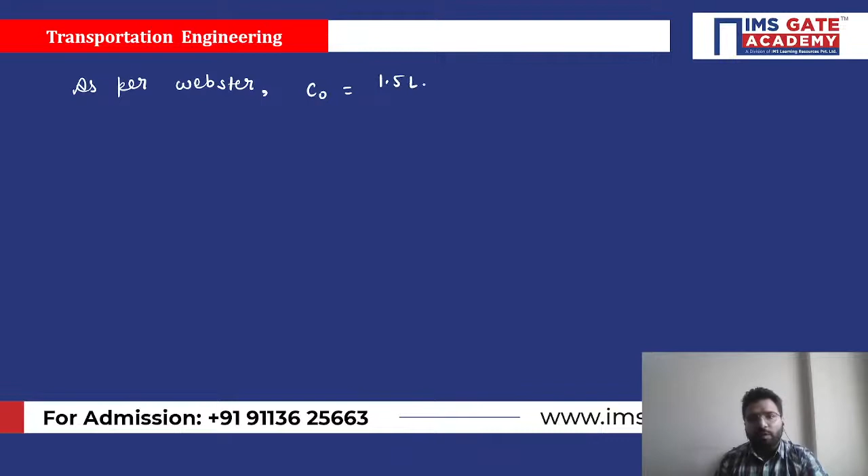So what is Webster method? As per Webster, the principle of the method is that delay should be minimized. Any signal you design, the basic agenda is that delay should be minimized. So what's the formula for Webster method? C naught equals 1.5L plus 5, upon 1 minus Y. So C naught is the optimum cycle length, 1.5 into L.

L here is the total lost time - lost time of all the phases. Most students make a mistake here: they consider whatever the question has given directly. No, you have to check whether they've given the lost time of all the phases, or per phase. If they give per phase, you have to convert it for all the phases. If they give the total for all the phases, that's okay for me.

And the 1 minus y term will come how many times? Whatever the number of phases are there. So here the question said to you 3 phases are there. So it will be y1 plus y2 plus y3.

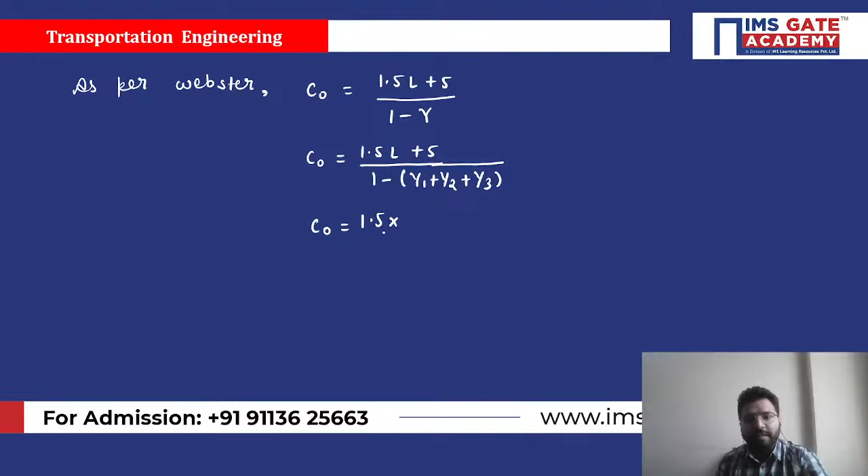Right, so if you see here, C naught is equal to 1.5 L plus 5. Let's put the L value first. So L value, if you see, the question has given 10 seconds. The total time lost in the cycle is 10 seconds. So 1.5 into 10 plus 5. So here you can see, the question has given lost time in the cycle. Cycle meaning all the phases are included, and 1 minus y is what here?

Y is the critical flow ratio. So how much have they given? 0.3, 0.25 and 0.25. Let's put the value here. 0.30 plus 0.25.

1 minute. Something is wrong. Just a minute. So here if I say C naught is equal to... 1 minute, just give me a minute.

So here if I say C naught is equal to 1.5 L plus 5 upon 1 minus y, and C naught is equal to 1.5, L value is 10, plus 5 upon 1 minus, and critical flow ratios are 0.3, 0.25, 0.25, so 0.30 plus 0.25 plus 0.25. Okay, so if you solve this, can you tell me, anyone, how much it's coming?

So to solve this, it's going to come 100 seconds here. Okay, so with 100 seconds, now what are they asking us? They are asking us effective green time, and we know the formula of effective green time, right? So G1 is equal to y1 upon y into C naught minus L, right?

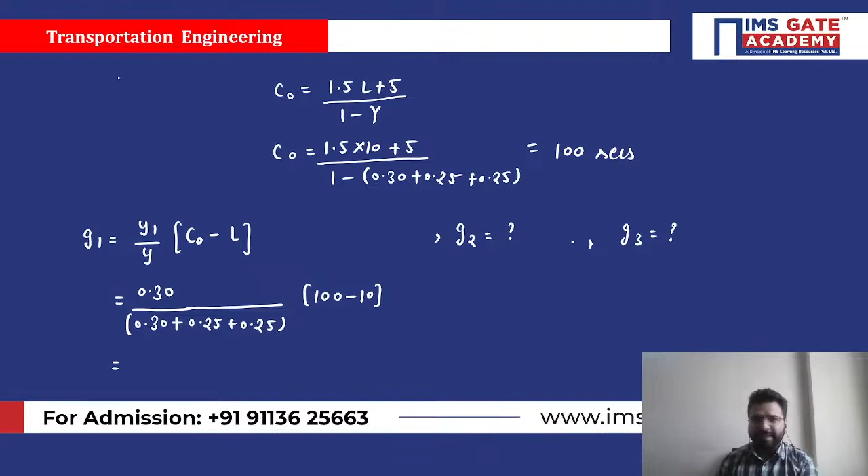But I don't want to solve in this way, right? If I solve in this way, it's definitely not a smart way. So here we have 100 seconds, and you see options are given to me here: 34, 28, 28; 40, 28, 28; 40, 30, 30; 34, 25 and 25. So I know the total cycle length is 100 seconds. And what is the meaning of cycle length? Cycle length means the summation of time allocated for each phase, right?

So now you will say, sir, we will do the summation, and whichever comes to 100 will be the answer. Like option C here, that is 30 plus 30 plus 40, that will become 100. No. Here is where students make the mistake. Definitely the cycle length is 100, but we have to include these 10 seconds also. You cannot ignore the 10 seconds here.

So what we do here, we have to check the option in which the summation is not 100 seconds but 90 seconds. Why 90 seconds? Because 10 seconds are allocated for the lost time. So now you can tell which option is correct, in which option the summation is coming 90. If you see here, 28 plus 28 is 56, plus 34, it will become 90, and definitely answer A is correct.

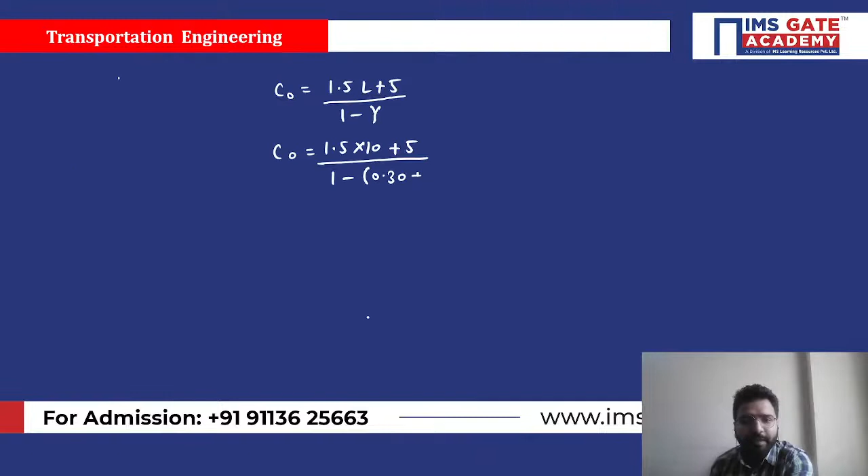Option A is correct. If you want to apply the formulas, you can apply the formula also, no problem. But the thing is, you can solve this question in a maximum of 15 to 20 seconds. Once you know the C naught value, it can be done with the help of options only. So here option A will be correct, 34 plus 28 plus 28. No need to do anything else, right? So this is the first question.

If you want to apply the formulas directly, you can, I have no problem with that. So option A is correct here. Why is option A correct? Because total cycle length will be equal to G1 plus G2 plus G3 plus lost time of all the phases.

So here you can see C naught, how much we got? 100. And G1 plus G2 plus G3 will be equal to what? Total lost time is how much? 10 seconds. So you can see here G1 plus G2 plus G3 will come to 90 seconds, and only one option is there which is satisfying this 90-second condition.

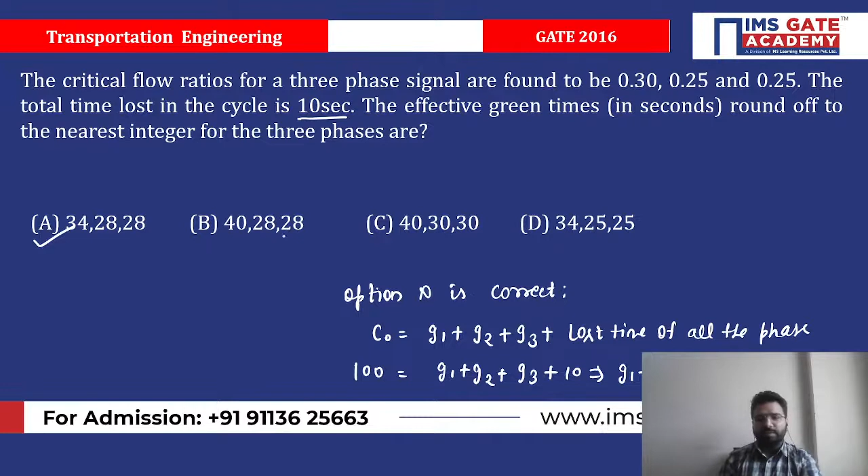Now the question may come in your mind, sir, if they have not given options, can we tell directly? No, beta, you cannot say directly. Then definitely you have to apply the formula. G1 is equal to Y1 upon Y into C naught minus L. Then you have no other choice; you have to apply the formula. Other than that, we can't do anything in this one.

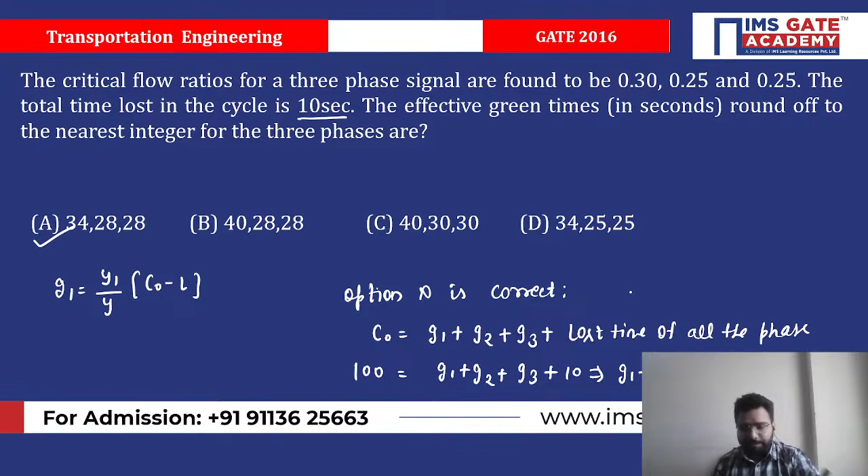Okay. And Webster method is one of the most important topics continuously coming in GATE. Don't miss it, only two formulas are there in the whole method, and a 2 marks question we have seen last year, last to last year, every year we are seeing the question. Okay. So let's proceed to the next question.

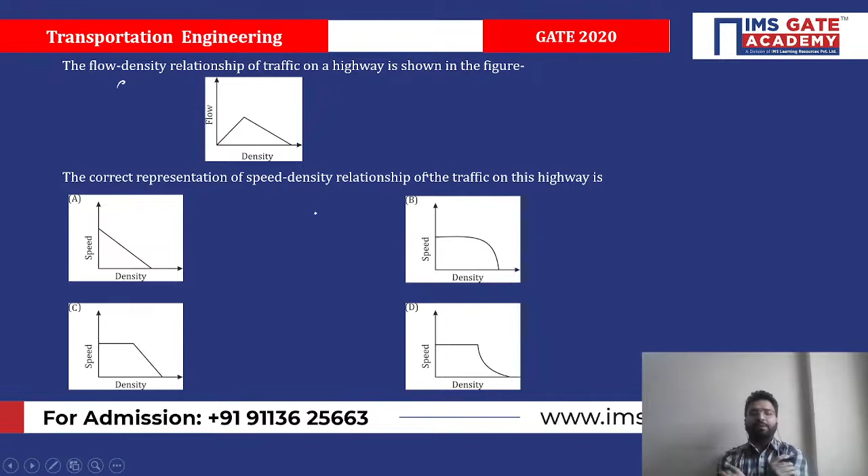The next is, again, a very good question, which came in GATE 2020. What is the question? The flow density relationship of traffic on a highway is shown in the figure. The correct representation of the speed density relationship of the traffic on this highway is. I put this question in the best category of questions that have come in transportation engineering in the last years. Okay, a really good question, right?

So flow is given to us, density is given to us. Flow generally we denote with Q, and density we denote with K. Now you think how to solve. The question looks like a transportation engineering question, right? But technically it's a mathematics question. Only one concept is required from transportation that I hope all of you know. Q is equal to K into V.

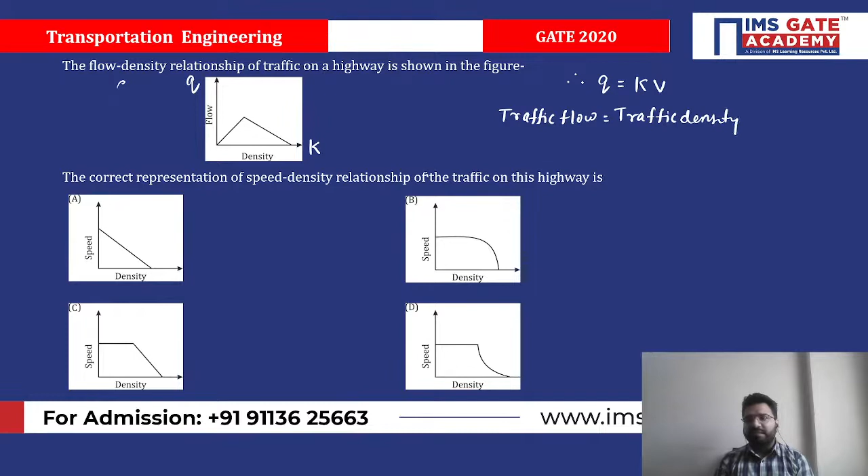What is Q here? Traffic flow. Traffic flow is equal to traffic density into traffic speed. So here I am telling you one more point. Traffic speed meaning is what? Traffic speed here means space mean speed. This concept GATE used last year, in 2022.

They have given the two types of speed in the question, time mean speed and space mean speed, and they ask you to pick the speed which was required in the question. So if the question gives you both speeds, we always have to pick the space mean speed. Time mean speed has no significance in that one. Okay, so now come to the question.

So as I said, the question requirement is only and only mathematics. So we have to convert the QK graph to a VK graph, because speed is V and density is K. So how can we convert? Simple mathematics. You can see here in the flow density graph, initially what is there? Initially they have given you a straight line, right?

So let me put some values here. Let us say here density is K1. I don't know, I'm just assuming some value. And here density is, let us say, K2. And here the flow is, let us say, Q1. Okay, I am just taking random values. Here K1, here K2, and here Q1. Now if I focus on the initial straight line, what is the equation of a straight line? You know.

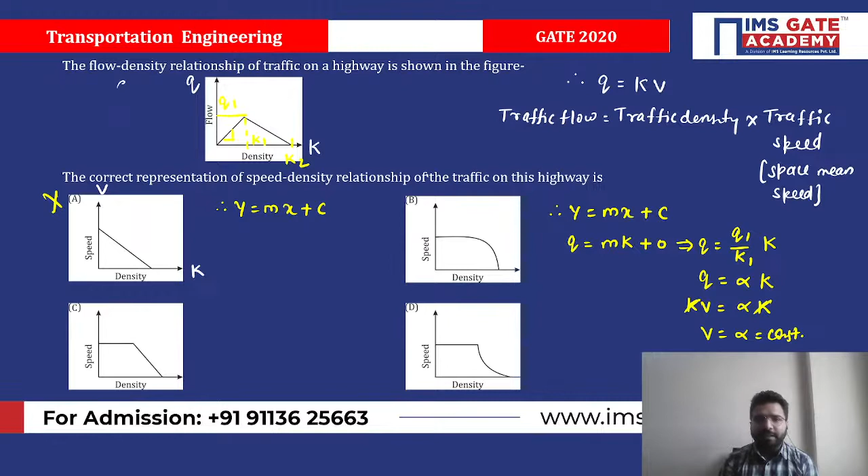So now how to check B, C, D? Again the same thing: write the equation. So for the second part, I'm solving here. Again, I know y is equal to mx plus c. On the y-axis, Q is there, and m into x plus c. You can see m here in this second line. This second line is what? It's decreasing.

So if it's decreasing, will the slope be positive or negative? Definitely the slope will be negative. And what is the slope value? Again, it will be some constant. What will be that constant? Let me write the constant. In this triangle, now you can apply tan theta. So it will come to Q1 upon

K2 minus K1, because this length will be K2 minus K1, into x. On the x-axis, what is there? K, plus C. Is C zero here? No, here C is not zero. Why? If you extend this line here, this part will be our C. How can we find this C?

You can see this is the complete bigger triangle. If you consider it, what C value will come? This is my C, and this is theta. Theta means what? This value I know. And if I multiply with K2, definitely it will be m into K2. M is what? Slope only. So theta into K2 will give us the C value.

So now you can see Q is equal to Q1 over K2 minus K1, a complete constant with the negative sign, so minus alpha into K, plus m K2. M is constant, K2 is constant; both become another constant, let me say beta. So this I got again between Q and K. I want it between V and K. So Q equals K into V equals minus alpha K plus beta. So V is equal to minus alpha plus beta upon K.

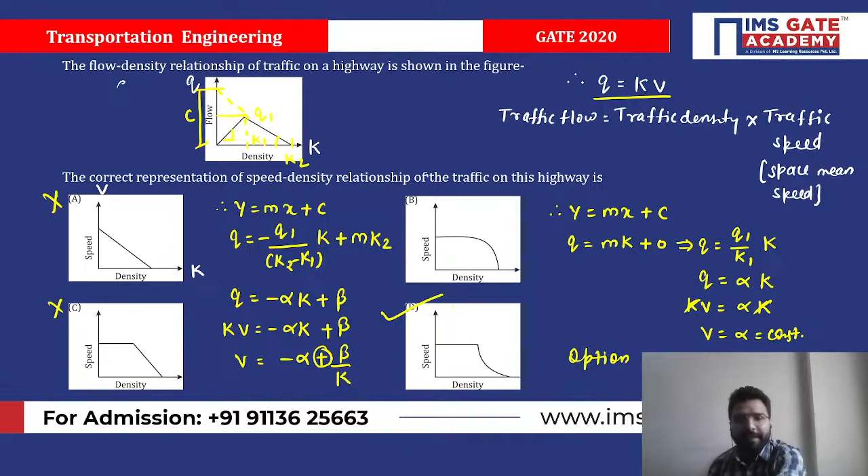What you have to remember: just write the equation of the curve, whatever is given to you, and Q is equal to KV. Eliminate the third variable which is not required. Here they want K and V, so I eliminated Q and put K into V. Maybe they want K and Q or V and Q, so accordingly you have to eliminate and check the options. So again it will not take much time. It's basic mathematics. Come to the third question.

On a road, the speed density relationship is found to be V equals 70 minus 0.7K, where V is the speed in kmph and K is the density in vehicles per kilometer. At the capacity condition, the average time headway will be? In the whole of transportation engineering, we have only one formula to calculate the time headway: C equals 3600 upon Ht, where Ht is in seconds, and C is in vehicles per hour.

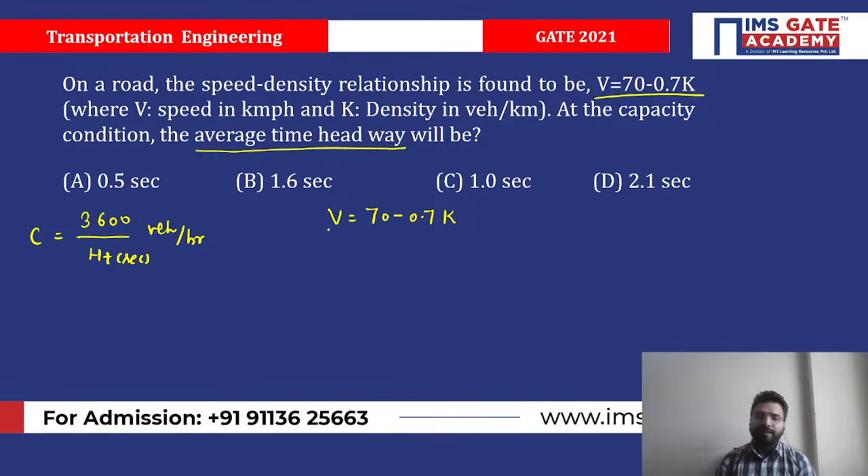So they are asking us to calculate the average time headway at the capacity condition, and they have given an equation: V equals 70 minus 0.7K. Notice the relationship between K and V is linear. If it's a linear relation, I know it's the Greenshields model. According to the Greenshields model, Q max equals Kj into Vf upon 4.

If I draw the curve for the Greenshields model, here we consider K, you can consider it on the y-axis also, and it's a straight line graph, with Kj here and Vf here, between K and V. One method is you write Q equals KV, take the first derivative, find the K value, and accordingly find the V value. I'm not going that way. I'm just going to apply a small trick, not a trick, it's also a concept.

Now in this equation, if K equals 0, the speed is Vf. So put K equals 0 and you get Vf equals 70 kmph. Similarly, if K equals Kj, what does Kj mean? Kj means jam. If there is a jam on the road, the speed becomes 0.

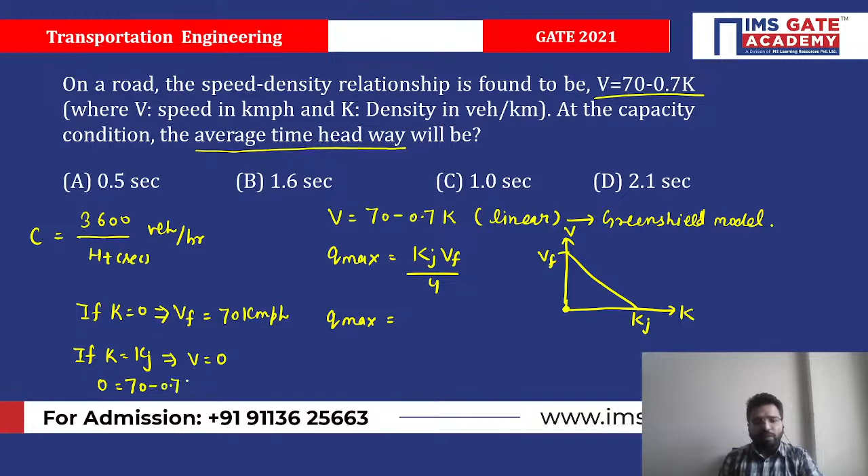So if K equals Kj, V will be 0. Putting this condition here, 0 equals 70 minus 0.7Kj, so Kj equals 70 upon 0.7 vehicles per kilometer. So Kj is 70 upon 0.7, Vf is 70, divided by 4. Can you tell me how much it's coming? 70 into 70 divided by 0.7 divided by 4. So how much is it coming?

1750 vehicles per hour. Right? Qmax means what? Qmax is nothing but capacity. Traffic capacity is what? Maximum flow possible. So here C means what? C is nothing but our Qmax. So Qmax is how much? 1750, which equals 3600 divided by HT.

So HT will come to how much? 3600 divided by 1750. It's coming to almost 2.057 seconds. So approximately option D is correct, 2.1 seconds. Okay, so option D is correct here.

But again, this question used the concept of the Greenshields model with the microscopic characteristics, that is the space headway or time headway. Always approach the questions by seeing what they are asking; first write the formula and see what is required and what is given. Whatever is given, put in the formula, then see what else is required, and what extra equations they have given us.

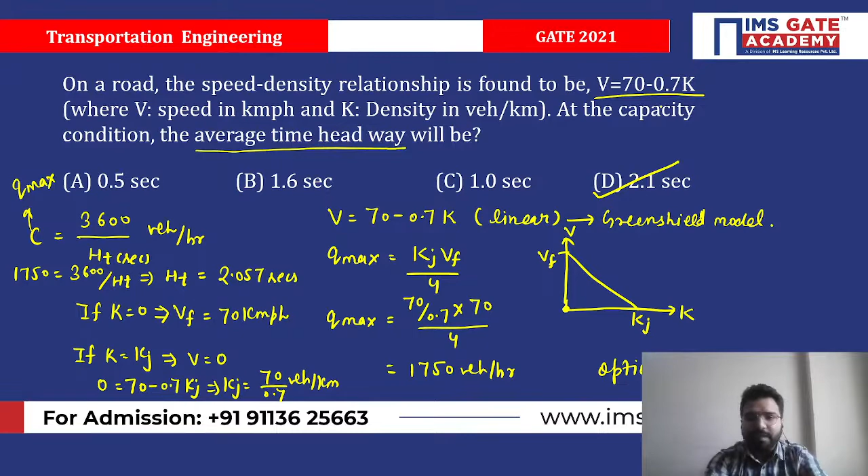For HT, I told you already, I have only a single formula in the whole subject. There should not be any confusion. For HT we have a single formula, C equals 3600 by HT, and you can apply this in a minute. It will not take more than 1 minute if you know the relationship between Q, K and V, and if you are good in the Greenshields model. Again, it's hardly a 30 to 40 second question. So this is the next question.

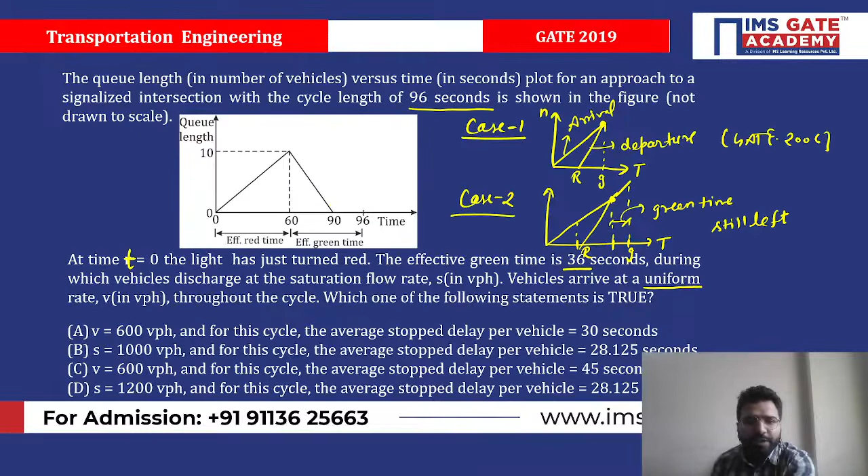You can see up to 60 seconds, vehicles are coming because it's red time. So let me say this is 60 seconds, this is my 90 second and this is my 96 second. So what happened initially? Up to 60 seconds, the vehicles have arrived.

How many vehicles have arrived? Here they have given us 10, they have given us 10. And definitely vehicle arrival will be uniform, so I will extend this line up to here. Let me extend this line up to here.

So now after 60 seconds, what will happen? After 60 seconds, the vehicles will start departing. So definitely up to what time are the vehicles departing? Up to 90 seconds, because 6 seconds are still left.

Meaning if I say here, up to 90 seconds vehicles are departing, so my departure graph will cut this line somewhere here, and this time is still left to us, this time is still left to us, right?

Now they are asking us three things: one is the vehicle arrival rate, second is the saturation flow rate, and third is the average delay per vehicle. So let's talk about the first thing, vehicle arrival rate.

Vehicle arrival rate is what, v? If they have given you the diagram, it's nothing but the slope of the arrival line. What is that? Slope of the arrival line, this is my arrival line. If I take the slope of this line, you can see what is slope.

Slope means tan theta, tan theta means what here? Perpendicular upon base. So you can see how much it is in this triangle. If I say it is 10, and here it's 60, so 10 by 60 meaning 1 by 6. What is the unit here? Any number of vehicle per time, in which unit given to us? Second. So vehicle per second, but they are asking us in VPH, vehicle per hour.

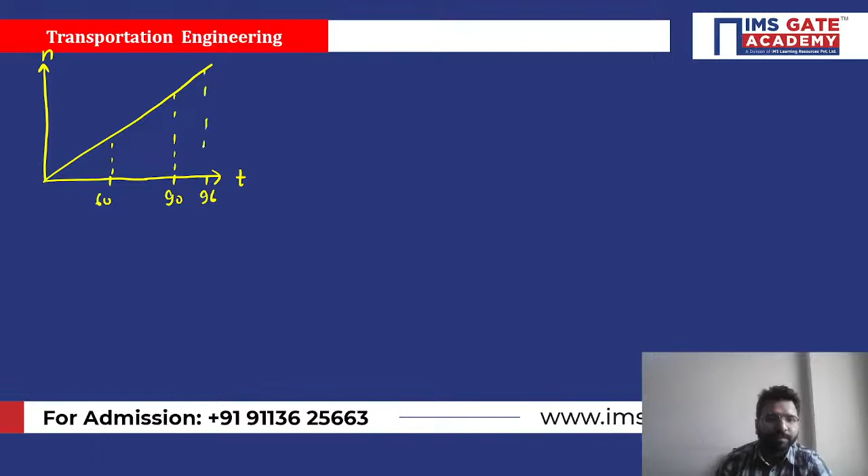90, 96. So here I have a diagram like that. This is the diagram: 10, 60, 90, and 96. Arrival rate is how much? 10 by 60, meaning 1 by 6 vehicle per second.

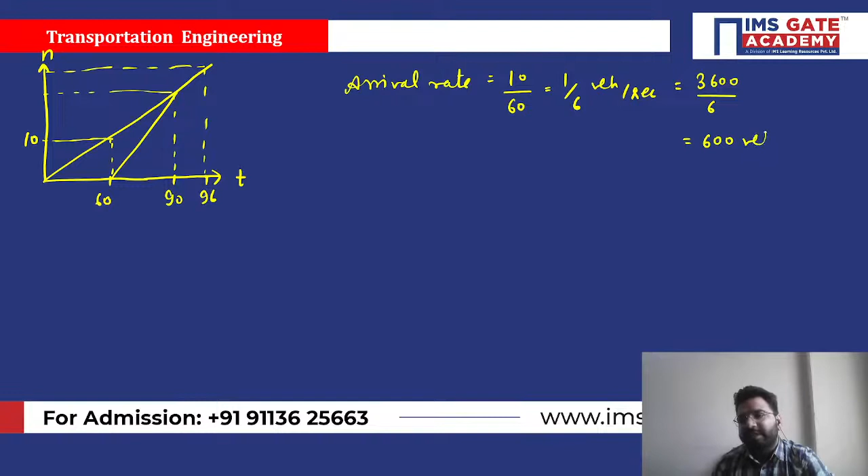I want it in vehicle per hour. So what I will do? 3600 by 6, how much will it come? It will come 600 vehicle per hour. So this is my arrival rate.

Next they are asking us for saturation flow rate, denoted with S. So how can we calculate S? Simple, slope of departure line.

Let me write here. This was the slope of arrival line, and this is slope of departure line. So how can we calculate slope of departure line? This is my departure line. I want the slope of this.

How can we calculate slope? Slope is nothing but tan theta, so perpendicular upon base. Meaning I want this height. How can we calculate this height?

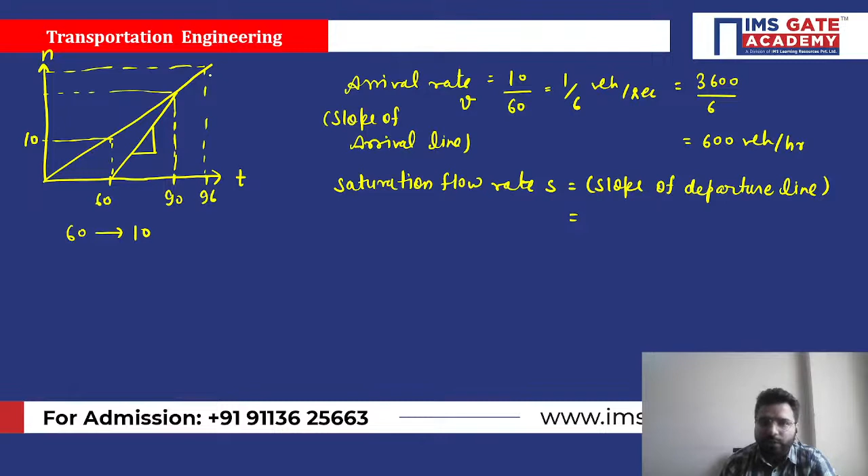Common sense: corresponding to 60, how many vehicles have they given? 10. Because it's a linear relationship, corresponding to 90, how much will it be? 10 by 60 multiply with 90. Solve it, how much is it coming? It will come 15.

So this will come 15. So slope will be perpendicular upon base, meaning 15 upon, and this is 60, and this is 90. So it will be 15 by 30, yes or no? 15 by 30 means 1 by 2 vehicle per second.

But they are asking us in vehicle per hour, so that will be 3600 by 2, meaning 1800 vehicle per hour. So what did I get? I got arrival rate, I got saturation flow rate.

Third thing they are asking us: average delay per vehicle. Now for average delay per vehicle, maybe you have heard the other formula also. But whenever they give you a diagram, don't apply the formula because it will be lengthy. I'm not saying it will be wrong, you can apply the formula, but that will be a little lengthy.

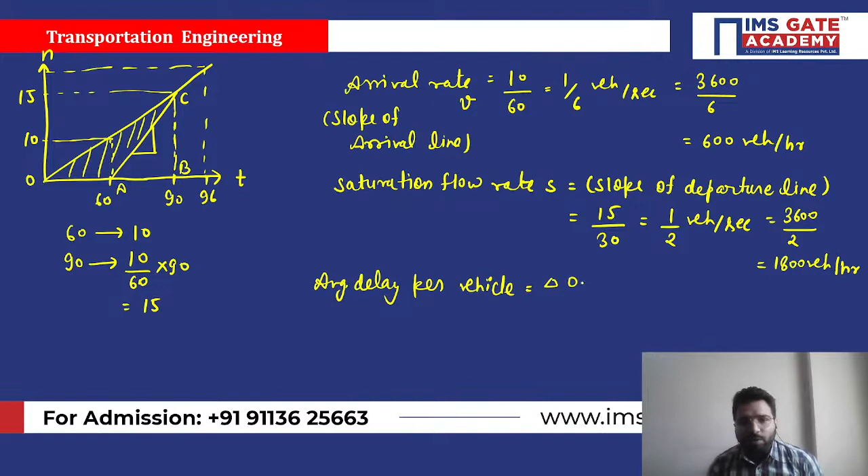So here you see, this is my triangle. If you take the area of this triangle and divide by the number of vehicles - so if I say this area, how can we calculate it? Let me say this is O point, this is A point, this is B point, this is C point. So triangle OBC minus triangle ABC, divided by number of vehicles.

Now here is the concept. Which number of vehicles? Most students will say 15. No, that's wrong. Which number of vehicle do we have to consider?

We have to consider the number of vehicles corresponding to the completely green time. Vehicles have stopped, right? I still have time - if in that remaining second other vehicles come, they can pass, I have no problem with that. So I still have time, but those vehicles are not in the queue, that's not my headache, right?

So what we have to do? We have to see the number of vehicles corresponding to 96. Same thing again: corresponding to 60, how much do we have? 10. So corresponding to 96, that will be 10 by 60 multiply with 96. If you solve, it will come 16. So here it will be 16. Always multiply corresponding to the effective green time.

That will be 16. So area of triangle OBC: half into base into height. Base is 90, height is BC, BC is 15. Minus area of triangle ABC: half into base, AB is 90 minus 60, which is 30.

Height here is again BC, which is 15. Divide by 16. If you solve this, it will come to 28.125 seconds. Okay, so three things we have found here.

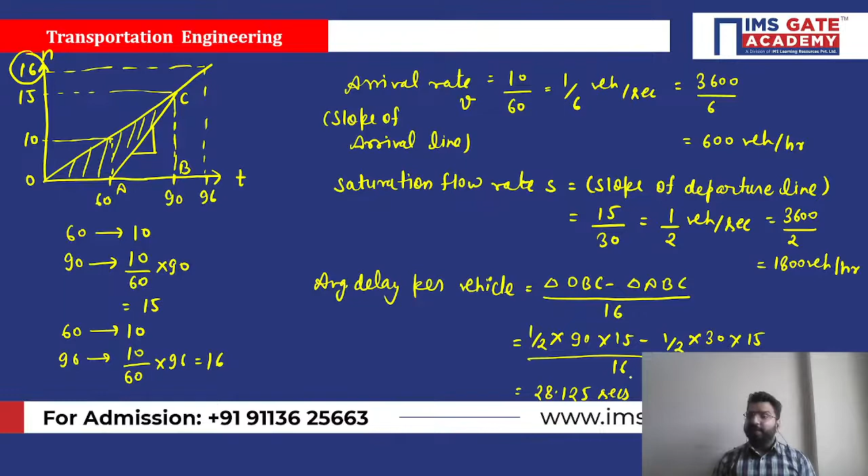If you divide by 15 here, it will come to 30 seconds. Now you can see which option is correct. We got arrival rate 600, saturation flow rate 1800, and average delay per vehicle 28.125.

So you can see 28.125 is here. It's here. But check here, saturation flow rate here it's 1000, and here we have 1200. How much did we get for saturation flow rate? Tell me fast, how much did we get there?

How much saturation flow rate did we get there? You missed that diagram actually. So if you see here, how did we calculate the saturation flow rate? The slope of the departure line actually. Okay, the slope of the departure line we have calculated. So it is something like that. This line slope we have calculated.

This was how much? 15 number of vehicles. This is how much? 15 height, and here we have 30. 15 by 30 is 1 by 2. How much is it coming? It's a mistake actually. I think it will be 1800 here. Okay, it will be 1800. So the option will be option B. It's a misprint here, it should be 1800, so option B will be correct here. The misprint, it's a mistype, so it will be 1800. So 1 by 2 and 3600 by 2 becomes 1800. So option B will be correct here.

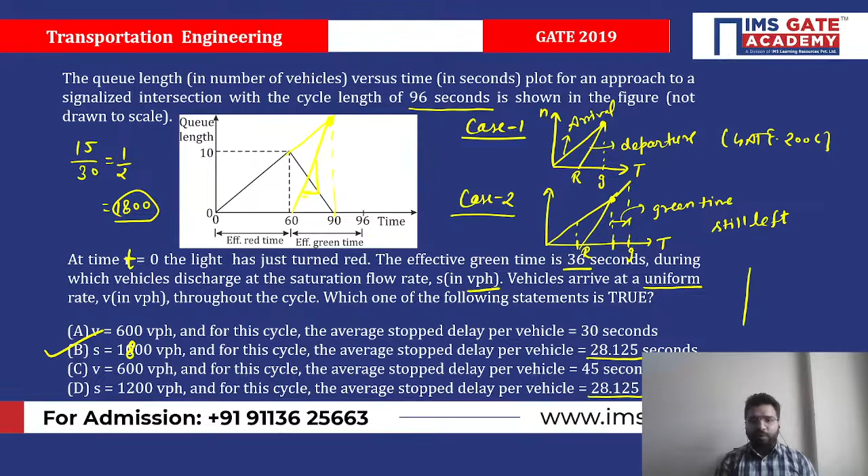Only what you have to take care of here is by which number of vehicles you are dividing. You are corresponding to 90 or 96. Always divide corresponding to 96, not 90. That's the only concept which I wanted to convey here.

Okay, next question which came in GATE 2015, and the question set by IIT Kanpur, and this year also the organizing institute is IIT Kanpur. Just see how beautiful this question is.

A super speedway in New Delhi requires a driver to negotiate turns with a radius of 335 meter, and they have given 33-degree banking. Banking means what? Anyone can tell me what banking means? Banking is nothing but super elevation. So super elevation is what? I hope all of you know, E, right? And they have given 33 degrees. So if you recall, when we derive the formula for super elevation, we write tan theta itself as E. So they have given it in terms of theta, tan 33 degree.

No problem. Given this information, what is the coefficient of side friction? Coefficient of lateral friction required to allow a vehicle to travel at 320 kmph. How much speed is required? 320 kmph is required. Now if you see the question, is 320 kmph looking practically possible to you? Not at all, right? A vehicle traveling at 320 kmph doesn't look good, it's not a practical thing. Definitely GATE also doesn't want a practical thing from you here, GATE wants to check your concept.

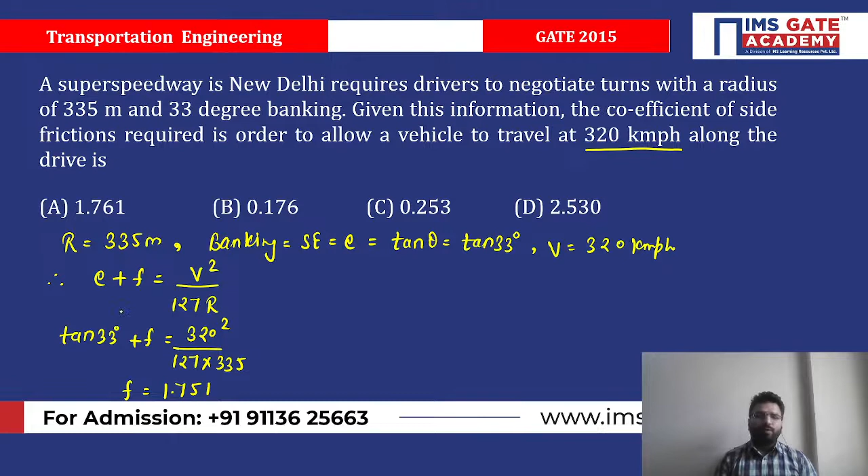How does GATE want to check your concept here? Let us say V is equals to 320 kmph. Now you tell me what you will do. Most of you will say, sir, we know E plus F equals V square by 127 R. E is given to us as tan 33 degree, F we want to find. V is 320, square upon 127 into R, R is 335, and you calculate F. It will come to 1.751 something, and you will say option A is very close to that and option A is correct. Yes or no? GATE also did the same thing, but GATE also made a mistake while giving the options here, and we are also making the same mistake. What is the mistake? If you remember, when you derive this formula, initially you get E plus F upon 1 minus E into F equals V square by 127 R. We got this formula, and comparing the values of E max and F max, we notice the denominator is almost equal to 1 and we ignore it. But if you remember, there we have some condition.

If I say for a plain terrain, we know E is equals to tan theta, and how much E maximum is possible in the plain terrain? 0.07. If you find the theta here, it will come approximately 5 degree. Meaning this denominator term is only 1 when theta is 5 degree or less than that. But if theta is more than 5 degree, you cannot say this denominator is 1.

This is the concept GATE used, meaning you have to apply the formula here, E plus F upon 1 minus E into F equals V square by 127 R. Why are we applying this formula here? Because the 1 minus EF term can be ignored when theta is less than 5 degree. If theta is more than 5 degree, we cannot ignore this term. We cannot at all ignore this term, right?

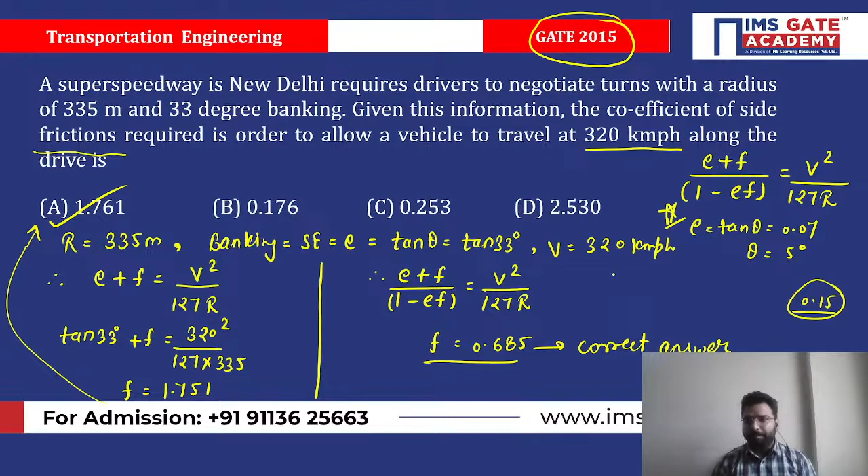And why it's important for you: GATE 2015 was organized by IIT Kanpur. And this year also, IIT Kanpur is organizing. So definitely you have to play with them. They should not play with you. Take care about this. Okay, come to the next question.

A super elevation E is provided on a horizontal curve such that a vehicle can be stopped on a curve without sliding. Assuming design speed V and maximum coefficient of side friction F max, which condition must be satisfied? This question was repeated in 2017. Before that, this question also came, maybe 2009 or 2010, and again this question came in GATE 2017.

So this is a myth that the question will not repeat in GATE. This is the example in front of you. Questions repeat in GATE. Only the options they have given different. But the correct option they have given same. Don't think the correct option is also made in a different way. No. Correct options they have given in the same way, just playing with small language. That's it. The whole question is same.

Now see what the question is saying. A super elevation E is provided on a horizontal curve. If we have provided the super elevation, let me say this is my inner side and this is my outer side of the horizontal curve. So definitely the outer side will be on a higher level compared to the inner, right? Definitely it will not be this much higher. I'm just showing you for understanding. Let me put my vehicle on this.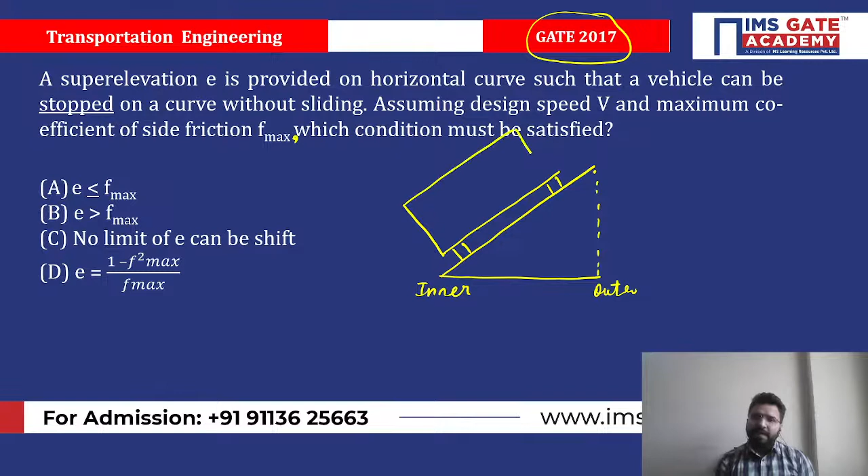Let us say this is my vehicle which is standing on this road. Assuming design speed is V and maximum side friction is F. Let us say this is my super elevation theta, or we say it's nothing but E. Now, how many forces will act on this vehicle? All of you will agree with me, one will be self-weight W, and the other will be what?

Most of you will say, sir, it will be centrifugal force, right? So P is equals to mv square by r. But the question said to you, the vehicle can be stopped. Vehicle is stopped, meaning speed will be how much?

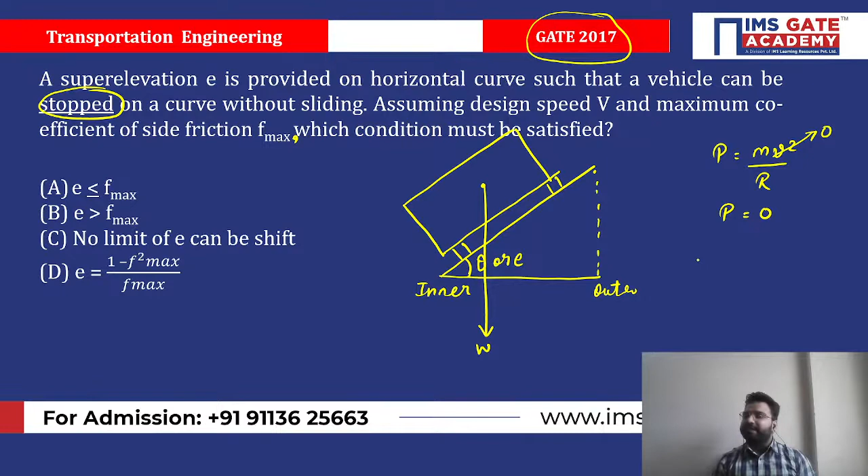Zero. If speed is zero, centrifugal force also becomes zero. No meaning of centrifugal force. Other than that, what will be there? Lateral friction will be there. In which direction? Inner or outer? You may think friction always acts in the inner direction. No, beta. Here the vehicle is stopped, meaning the vehicle will try to slide inward. So friction always acts in the opposite direction. So friction acts in the outward direction.

F into N. Let me write here F max, because the question said the maximum is F max. Okay. So these are the forces acting on that. So here you know the simple mathematics. If this angle is theta, and this is 90, so if I draw this, theta, 90 minus theta, this will also be 90 minus theta, this will become theta. So this is W, this component will be W cos theta, and this component will be W sin theta.

Now, I don't want the vehicle to slide. So the vehicle will not slide when F max N is greater than or equal to W sin theta. When this outward force is more than the inner force, definitely my vehicle will not slide. So F max into N, and N here is W cos theta, should be greater than or equal to W sin theta. W and W cancel. It will come F max greater than or equal to sin theta by cos theta, tan theta. So F max is greater than or equal to tan theta, and tan theta is nothing but my super elevation.

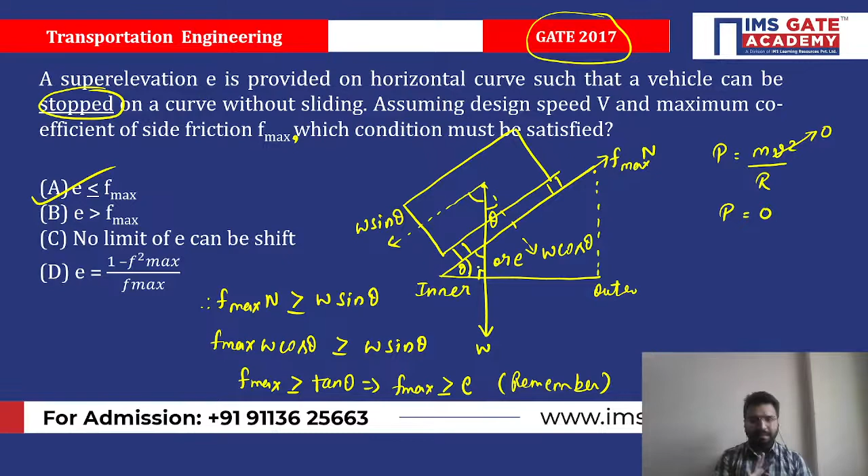Again, I am saying the question has been repeated. If this repeats again, it won't be a surprise for me. It can be repeated again. Okay. Next question. This question came in GATE 2015. The topic from which the question came, mostly students don't know this topic. This type of topic is also there in transportation engineering.

What the question is saying: a sign is required to be put up asking drivers to slow down to 30 kmph before entering zone Y. You can see they have given zone Y in a figure. On this road, vehicles require 174 meter distance to slow down to 30 kmph. This sign can be read by 6/6 vision drivers from a length of 48 meters. The sign is placed at a distance of X meter from the start of zone Y, so that even a 6/9 vision driver can slow down to 30 kmph before entering the zone. The value of X. Now I am giving you 30 seconds.

All of you just try to understand what the question is saying to you. The question said here two people are there. One has a vision 6/6, the other has a vision 6/9. For the person who has 6/6 vision, the sign is read at a 48 meters distance, and for the person who has 6/9 vision, we have to find it. And the question said, on this road vehicles require 174 meters to slow down to 30 kmph. Beta, this is not a sign, it is the direction of movement.

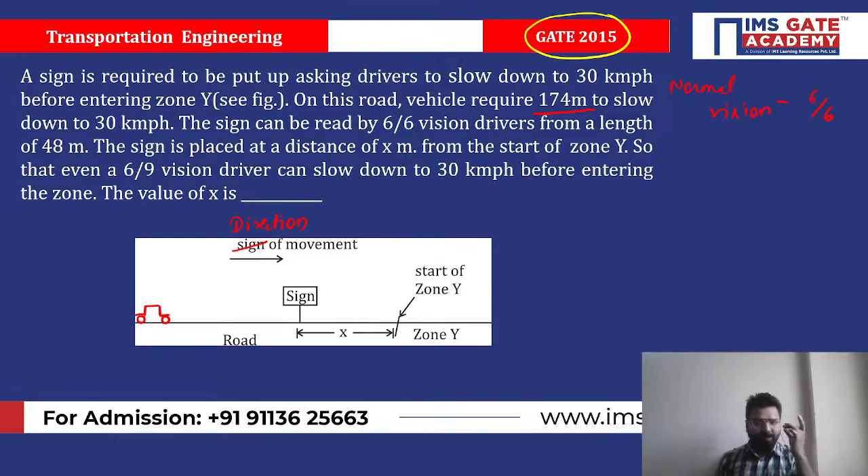So let us say I have a driver who has normal vision. Normal vision means, if you remember, if any person has normal vision, it's 6 by 6. If you go to the doctor for an eye checkup, they will give you the number in the form of 6 by 6 or 6 by 9. You say, no sir, plus 1, minus 1. That is the lens power, the power of the lens. This is not your vision. The vision will always be defined with reference to 6. Okay, 6 by 6 means what?

6 by 6 meaning is what? If I say a person has normal vision, it means the person can read a letter of approximately 8 mm size from a distance of 6 meters. This is the meaning of 6 by 6. Meaning, if I am able to read an 8.5 mm letter from a 6 meter distance, my eyesight is normal.

Okay, now what is the meaning of 6 by 9? If a normal person can read from 9 meters, and a person has poor vision, does he have to come closer or go farther away? Definitely he will come closer. Meaning, if a normal person can read from 9 meters, the person who has poor vision, 6 by 9 vision, can read from 6 meters. This is the meaning of 6 by 9.

Okay, so this topic comes in traffic characteristics. In driver characteristics, we have 4 types. In physical characteristics, we have vision. From the vision characteristics, GATE framed a question. Only one time the question has come from this topic, but it's common sense.

So now if this is a normal vision person, a 6 by 6 vision person, for him 174 meter distance is required, and the sign is placed at a distance of 48 meters. Now if this person becomes 6 by 9, should the sign go this side or that side? Definitely the sign should come closer. So let us say I shifted the sign here for him.

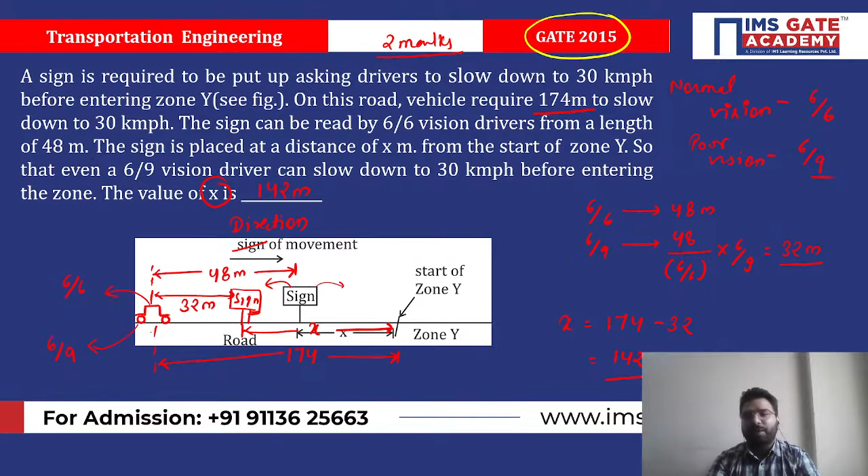So don't miss any single topic. If you are having difficulties, that's another thing. But don't try to skip anything, and go ahead with the topics which are not coming regularly. The GATE trend has changed. Topics which are not expected are coming in the GATE exam nowadays, so you have to take care. This is an example of that type.

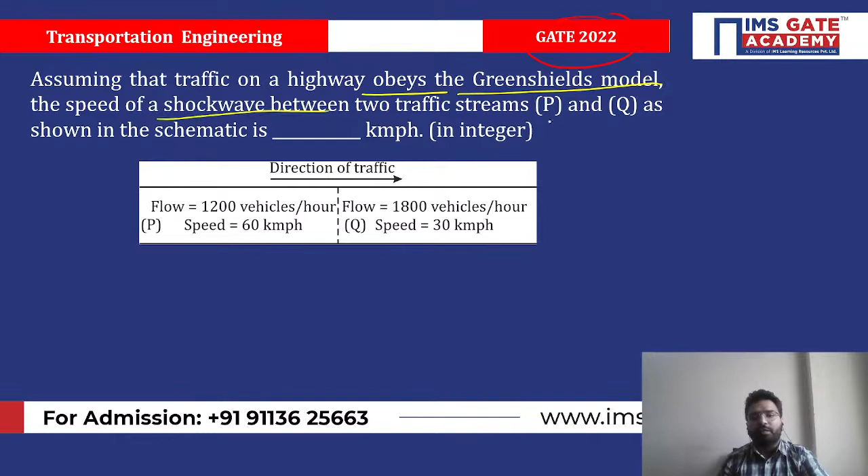One more question. This question came in GATE 2022. It's a very simple question. I'm taking it because most students don't know the meaning of shock wave, because questions have hardly come from this topic. Assuming that the traffic on a highway obeys the Greenshields model, the speed of shock wave between the traffic streams P and Q. Okay, so most students will be stuck here: what is a shock wave?

Don't forget the shock wave, whatever it is. Okay. They have said to us Greenshields model. I know that Q is equal to KV. So speed V is equal to Q upon K. They have given me two states, one is P and one is Q. So I can say dQ by dK.

Now, if you ask me, sir, what is the meaning of shock wave? Usually this concept is used in vibration analysis of bridges and all. Mostly in the masters, in MTech, students study this. In BTech it does not have much relevance. So I'm not going deep, but the only thing is when the flow or density suddenly changes, the shock wave is produced.

If the speed comes positive, we say the shock wave is moving in the direction of traffic. If V comes negative, we say the shock wave is moving opposite to the direction of traffic. If V is 0, we say it's a stationary shock wave.

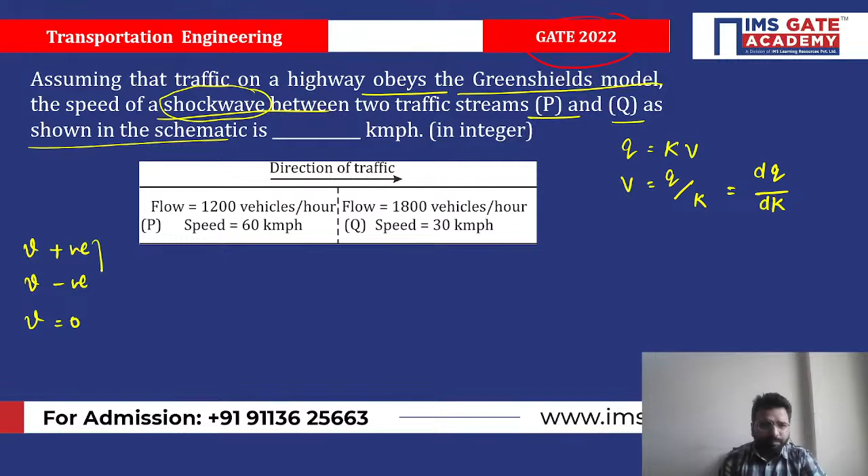That's it. So in GATE 2017 a question came where they plotted a graph. Actually all options were correct, because if the flow is equal, the shock wave will be stationary. If it's going down, it will be a negative shock wave, and if it's going up, a positive shock wave. You can check GATE 2017 or 18; one question came from this concept.

But here, the speed of shock wave V is equal to dQ by dK, that is QQ minus QP divided by KQ minus KP. So QQ is given to us as 1800. You can ask, sir, why are you writing KQ first? You can write it the other way also, no problem. But if you start from Q minus P in the numerator, you cannot write P minus Q in the denominator. It's your choice.

QP is how much? 1200. Have they given us K? No. They have given us speeds 60 and 30. I know K is equal to Q upon V. So I can write QQ upon VQ minus QP upon VP. Just put all the values here.

V is equal to 1800 minus 1200, that is 600, divided by QQ upon VQ, 1800 by 30, minus QP upon VP, 1200 by 60. So if you solve this, you will get the answer 15 kmph. Without a calculator you can solve this question.

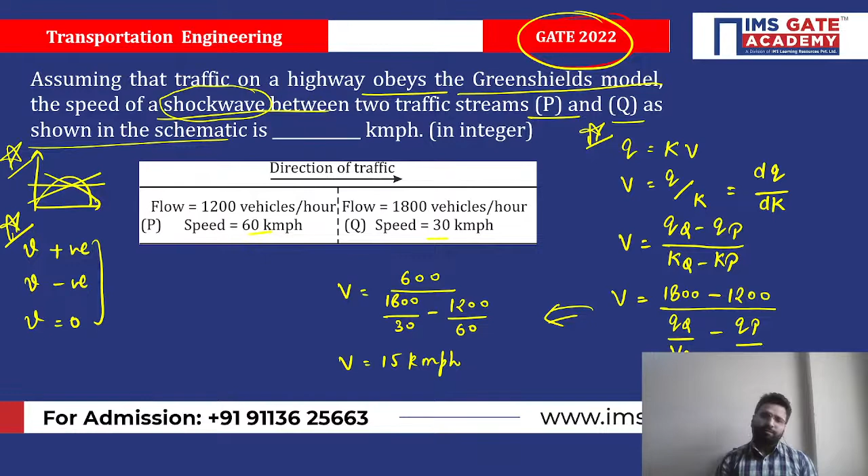You can ask me, sir, how is this Q changing, how 1200 at 60 and 1800 at 30? That's not your concern. They have given the flow on the road and things are changing. It may be due to road conditions or any conditions. So we should not go into that. Just solve the question, get the marks. That's it.

One more question, this also came in GATE 2022. This is again one of the most important topics in GATE, that is Marshall mix design. Mostly questions come from this topic. The question is: an aggregate mix of 260 grams of coarse and 240 grams of fine aggregates, specific gravity 2.6 and 2.4. The bulk specific gravity of the mix is 2.3.

Percentage volume of air voids, I hope you know, that is VV percentage they want. The formula is GT minus GM upon GT multiplied by 100. I always say, whatever they are asking, write the formula first. They are asking VV, so I want GT and GM. Bulk specific gravity of the mix, GM, they have given already as 2.3. Ultimately I want GT.

You may have studied the formula of GT: W1 plus W2 plus W3 plus WB upon W1 upon G1 plus W2 upon G2 plus W3 upon G3 plus WB upon GB. Now you can ask me, sir, they have not given bitumen, how can we apply it? It's not your matter of concern.

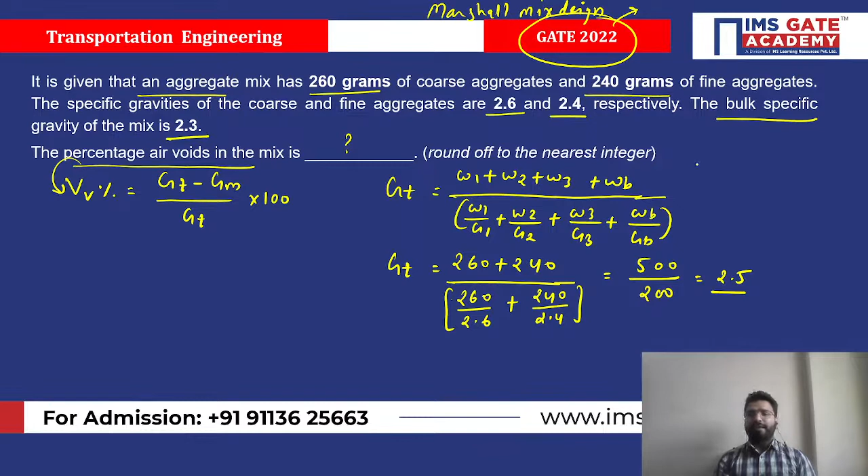One more doubt may come in your mind, sir. You have maybe studied one more formula, 100 upon W1 in percentage divided by G1, something like that, right? This formula you always apply when the weights are given to you in percentage. If they have not given you percentage, they have given absolute values, you have to apply this.

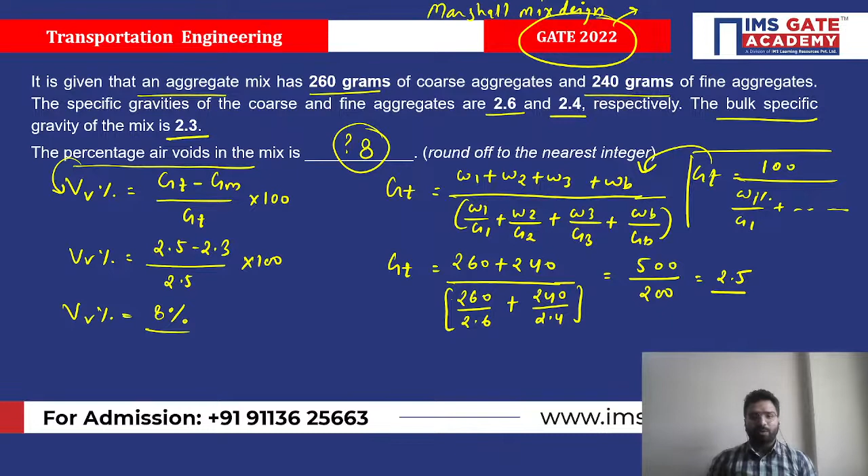So VV percentage is equal to, GT is how much? 2.5. 2.5 minus 2.3 divided by 2.5 multiplied by 100. How much is it going to come? It's going to come 8%. Again, this is the example. You can see no calculator is required. Without a calculator you can solve this question, and it will hardly take 15 to 20 seconds if you know the thing. Okay, so that's it from my side, but before that I'm telling you something which will be important.

In the last few days before the GATE exam, if you have time: horizontal alignment, second is traffic flow characteristics, Webster method, and Marshall mix design. These are the 4 topics. From these, we are seeing questions almost every year.

Horizontal alignment means super elevation, extra widening, etc. Traffic flow, you know, Q equals KV formula. Webster method of signal design, all of you know, and Marshall mix design. Usually we have seen questions from these 4 topics in the GATE exam, most years. So these topics you should not miss at any cost. Not 5 to 6, I should say 7 to 8 marks are coming from these.

Yeah, 1 or 2 marks will be there where they can play with you. Sometimes they ask data questions, sometimes other things. If they ask data questions, no need to worry. Even the IISc and GATE toppers are not going to remember that data. Always run behind the concept-based questions. In GATE 2015 they asked a question from signal design on some IRC specification. Nobody remembers, because hundreds of specifications are there and all the values cannot be remembered.

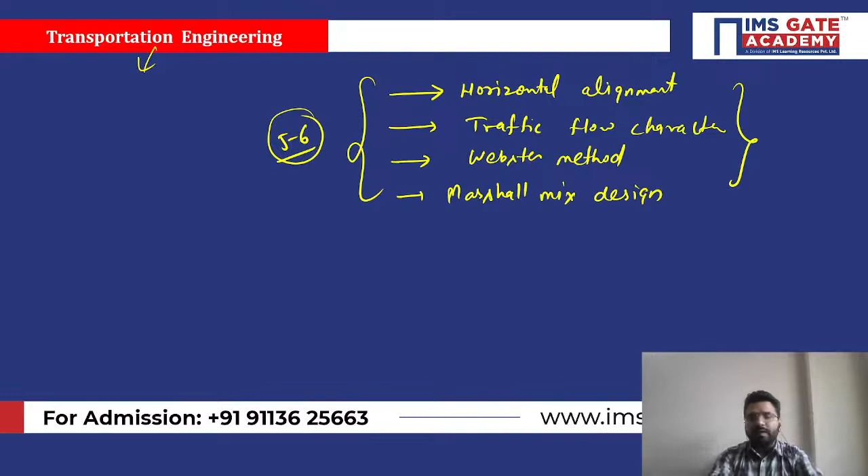So that's it from my side for this session. Almost 9 questions we have solved, on the most important topics, and you can see we don't need more than 1 to 2 minutes for solving any question. It's not a trick; it's all concepts, but applied in another way. All of you know the concepts, but how we understand those concepts is the only game.